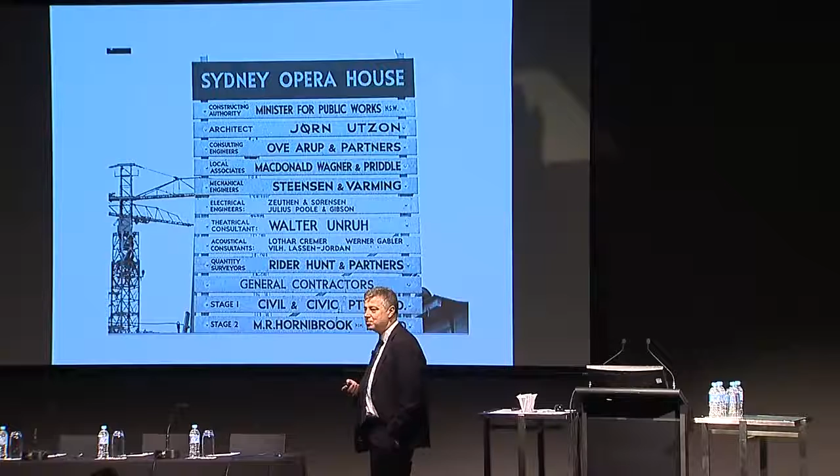And this was their project team, and there's some pretty famous names in all of that - a mixture of Australian companies and overseas firms, and many of those firms are here today. So what it actually represented, ultimately, was really one of the most outstanding examples of integrated project delivery - the way that the architects, the builders, the engineers worked together to deliver a very, very complex project.

So where we come in now, 40 years later, in 2013 - Sydney's learnt to celebrate it and love that building. We were just up at the Danish embassy a few weeks ago, and they told us there's quite a big celebration coming up in October to celebrate the building.

We also have our Construction and Innovation Awards. You look through those awards and you can see them on the internet, and we're still doing some fantastic work. But I suppose for me, the real issue is around what we all know in this room - the issues around construction. A lot of people will tell you that it's never been so tough in the industry, so problematic, and in many ways so dysfunctional.

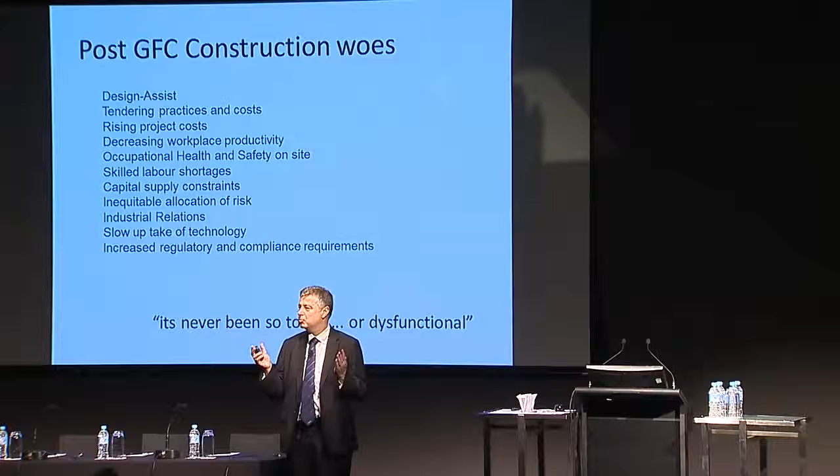So we've got a major challenge, and what we really need is great projects and great delivery. And the best way to do that is with BIM and with IPD. So what we need to do as an industry is celebrate delivery excellence. And until we are able to do that, we're not where we need to be.

If we keep doing the same things that we've been doing, and in fact things are getting worse, things will just continue to get worse. So I've really come to the point that for us, it's very clear that the only way forward is BIM and IPD, and I want to take you on a bit of a journey around that.

In 2010, we went to the US, and I think it was Mark Lowe from the BSA group and Albert. We went to visit a contractor, a mechanical contractor, a big contractor in San Francisco, a company with about a 60-year heritage. We were brought to this firm to have a look at what they were doing, because they actually had some really good capability in terms of BIM and green rooms and those sorts of things.

But I was shocked, because I walked into that building, and there were about 15 people there. The managing director was doing estimating. This was their CAD team, all gone.

I guess the thing that Steve said yesterday was that he was doing this thing. He said that basically, it got so desperate in the US that they actually had to work out what to do, because they couldn't keep doing what they were doing. They actually had to find the single thing that they had to go and do to get their company through. So I saw that, and I was shocked.

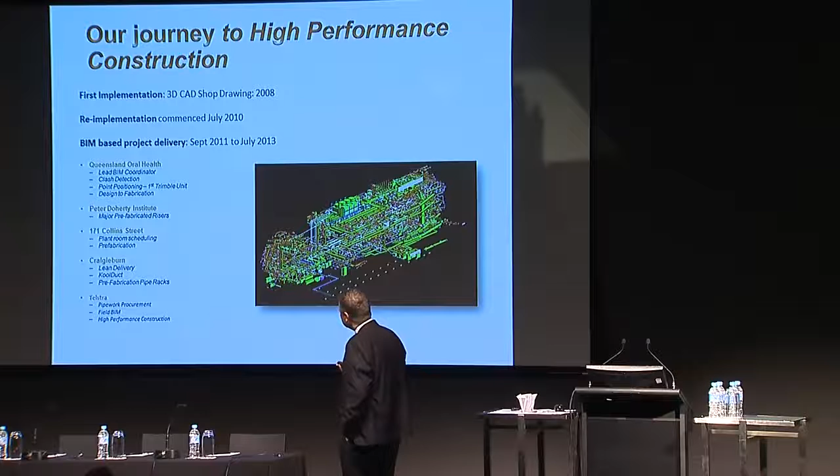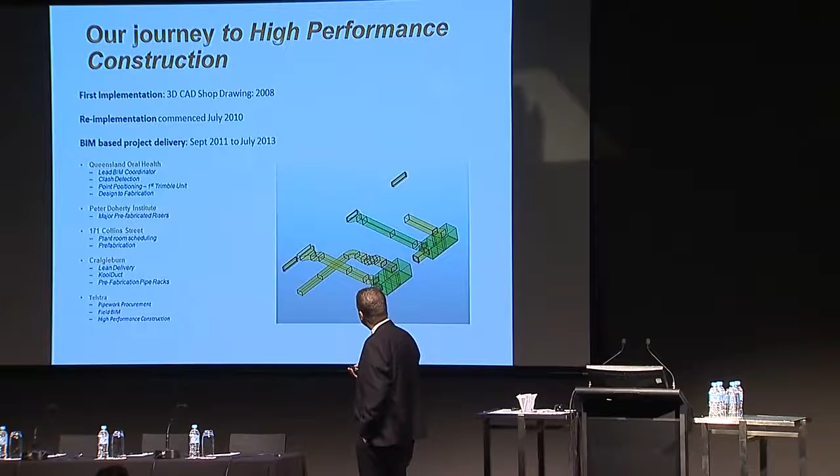We ran the clash detection, worked out how to do that. We worked out how to do a BIM construction delivery plan. We did our very first design to fabrication runs - not perfect, but we got it up and running.

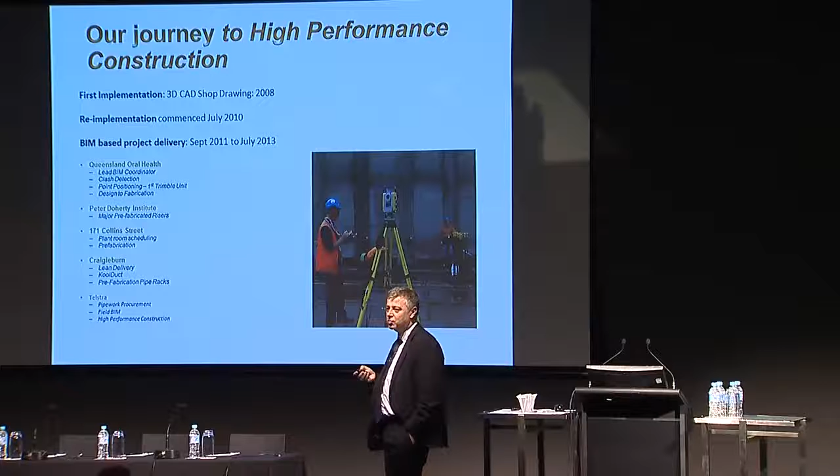We got our first Trimble into the top deck. So what we'd seen in the US, we did for the very first time, Trimble into the top deck - I think in Australia, as David said. There'd been a couple of others using Trimble before us, and it was all being done from the underside, but we actually got it into the top deck, and that transformed the way we did construction. And there you can see the blue bangers.

Now, one of the things that also, in terms of talking about design to working with your supply chain - the first blue bangers we could get were all Imperial. Different companies said Australia's too small as a market, we can't get the US interested. Now we've got metric hangers, right? So that's about working with the supply chain to actually get things sort of working as an industry supply chain.

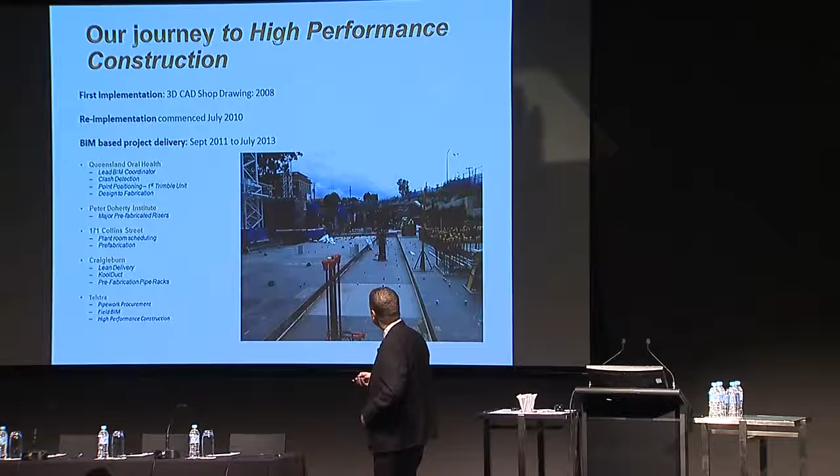We then went to Peter Doherty, and there was actually a job before this, 735, and these are the prefab risers that we put into this project. So with that, we put in 18 modules in 3 days. We really developed our capability in that.

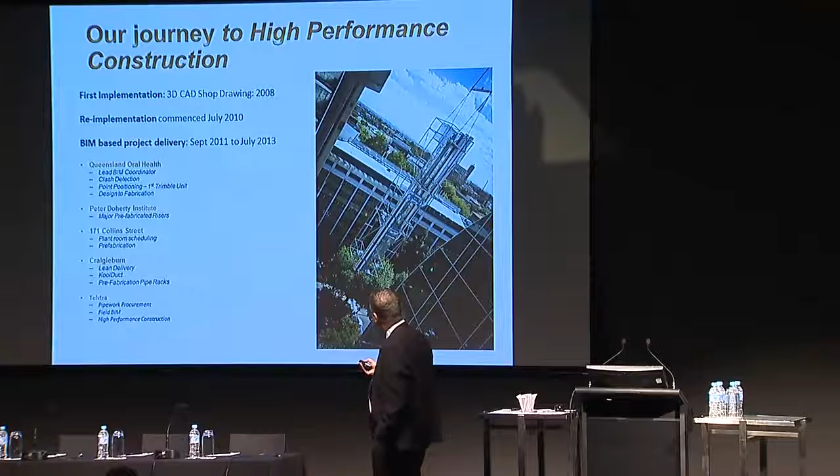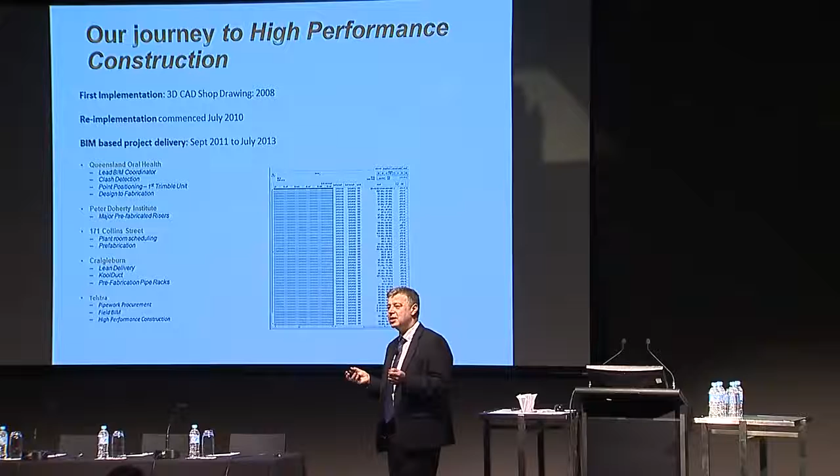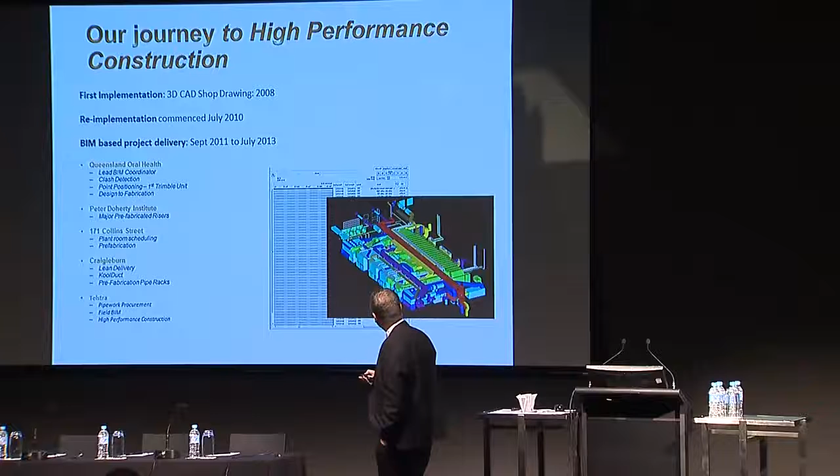And then the next project, each time we're building on what we're doing, we looked at scheduling. The thing around scheduling is, I love Primavera, I need to say that, but it can be very difficult to communicate to a project team around a program, a 28-page program. It's actually much more powerful to convert that program into a model and then schedule it out using the model.

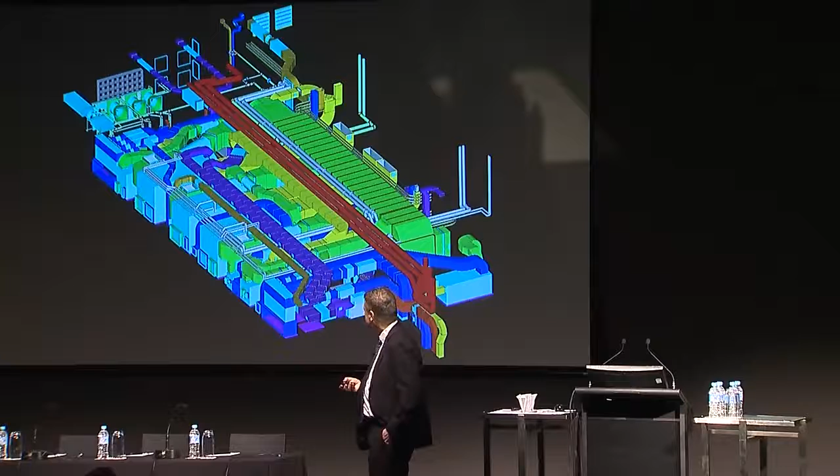So this was the model for 171 Collins Street plant room. Very, very tight, very difficult access. With the ability of BIM, we were able to actually work out how to deliver the thing, sequence it. Not only that, we were able to schedule the supplies, because it was so tight, moving stuff, bits of duct and all the rest of it around the plant room made a huge difference in terms of how we delivered that plant room.

So from that, we consolidated. We then got into Craigieburn and we got into lean delivery. With lean delivery, what we do is try and consolidate all the things that we learnt and work out what it really means in a project delivery sense. We got our first very big KoolDuct installation, and one of the first projects for us to roll out the piping racks.

So as you can see, we're progressively building a capability. At the start of each job, we decide what we're going to do in terms of the next phase of our strategy. So Telstra, which is a data centre, we decided that was going to be our chance to bring it all together, and we were going to really try and implement it.

It was a great job to do it on, and the reason it was a great job was for two things. One is it's principally services, so the structure is pretty straightforward. We've got Lend-Lease building the structure and managing the project and the client and all that sort of stuff, but principally it's about 80-90% services.

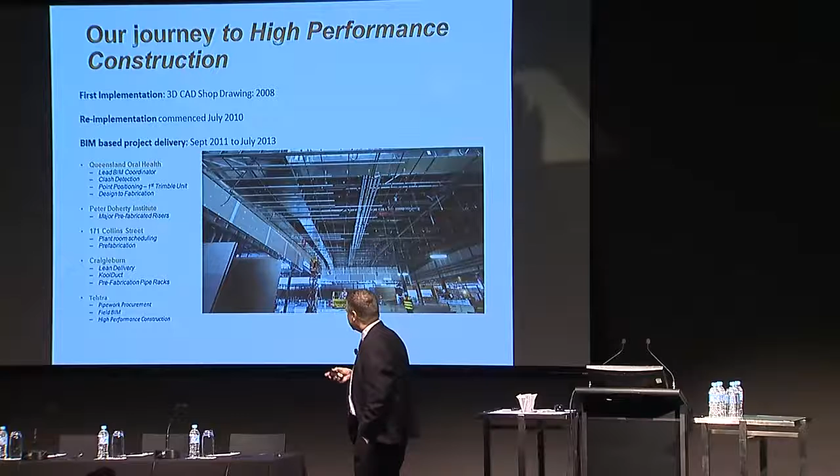We decided that we'd pilot field BIM and bring all these things that we've learnt so far together onto one project. What we were really aiming to do was consolidate all of those lessons. The key enablers for us were we wanted to get BIM-enabled construction. Our guys are now using the model in the field, day in, day out.

We also wanted to really consolidate this Revit design. We got a fantastic model from AECOM, fine-tuning it, developing it into a constructible Revit model, and then using that as the basis for our commissioning and as-built delivery. So what we really set ourselves as a mantra for the project was to get this to be BIM-enabled construction.

The other thing that Alistair McDonald said last year, which I didn't really pick up on for quite a while, is actually the reason we've changed the name of this forum, because BIM is the actual platform for innovation. What we have learnt as an organisation is that we can actually use BIM to innovate. So now we've got people at the top, people at the bottom, people everywhere, people on site, all of them coming back and doing really great stuff.

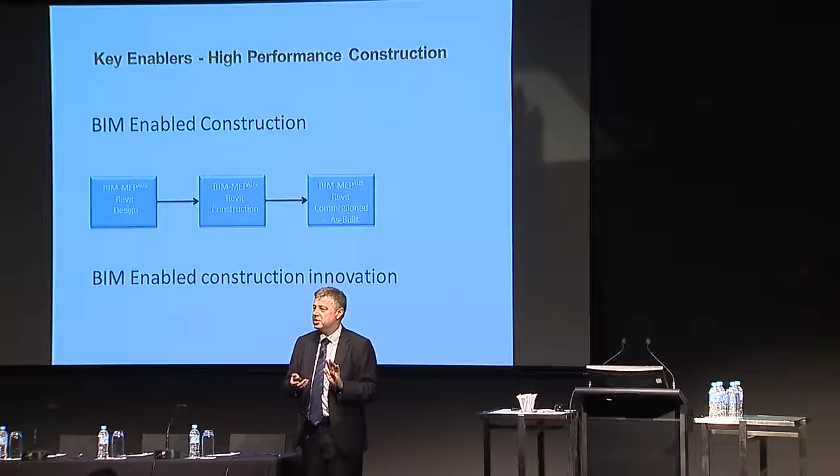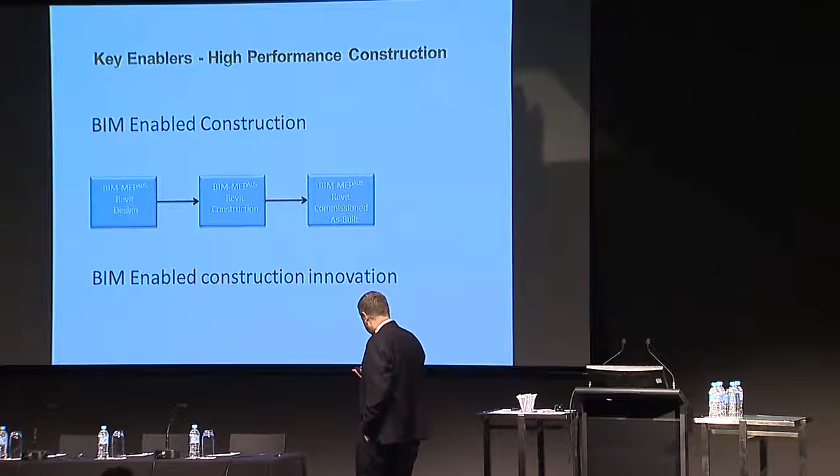So what we've been able to do is energise our team, and the innovation is coming from everywhere. It's actually quite difficult to manage. When I look at this, and we took Kyle Holmes out to have a look at this site, I was actually blown away. When I looked at the Balfour Beatty slide, I realised what this looks like.

So what does it mean in terms of safety? It means there's virtually no material sitting on the floor. You walk around, this is the cleanest site that you have ever seen. Stuff comes in, it gets lifted and it gets put into place. So things that would take a week, two weeks on site, sitting around in bits and pieces everywhere, now come in and go up.

We've got an optimised solution. AECOM did a great job in terms of their design. We probably put some construction expertise into that model and developed it up.

We're exploring all sorts of new technologies and processes. There's virtually no waste on site. It's a clean site. You walk around, I think Kyle would agree, it's just amazing how little's there.

Quality, the quality is brilliant. So this is virtually a fully prefab solution that's using Victaulic throughout. We work really well with Victaulic and One Steel, so we're working much more seamlessly with them. It's a fantastic solution in terms of the quality that we've got on site.

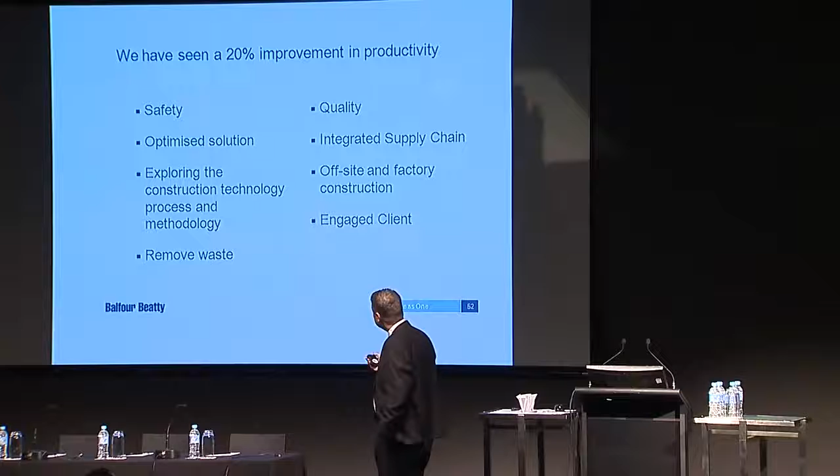Safety and design, it's fully coordinated. One of our BIM modelers, Brett, said the amazing thing is with drawings you're always looking down, but with BIM you can look up in the virtual world and actually see the access issues. We walked around, and we'd separated the cable trays so we could get to our access panels. We've done a lot of really good stuff in terms of safety and design.

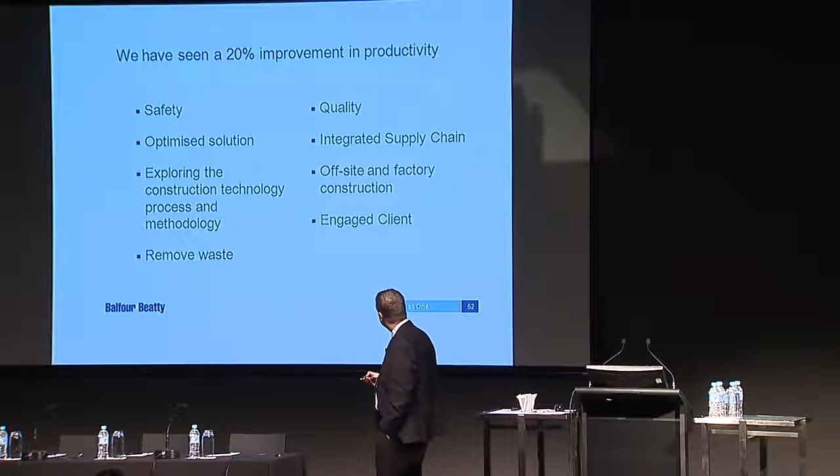We have integrated our supply chain. We're making really extensive use of our off-site and prefab facilities, and that's working seamlessly. And we've got an engaged client. When I say engaged, I just want to talk about engaged clients.

So here's the difference. You want to use Trimble, okay? You start the job and go, oh, we want to do Trimble. One approach is everyone sorts out their own reference nodes - that's not my problem. On this project, the builder's providing the reference nodes. The surveyor sets them onto some external sites, onto external buildings, so everyone using Trimble is using the same set out points.

They're using the same model points. Once the walls get put up, the surveyor comes in and puts the next point. So everyone is using the same set out points, right? That's again the difference between getting some benefit and getting the maximum benefit.

I think we've got a happy client on that, and I think we've got a happy consultant, because of the amount of time they're spending on RFIs and defects on sites. I used to be a consultant, and I know you used to make money in design and lose it in construction. From what I understand from AECOM, they're pretty happy.

So what to expect from all of this is we have to spend more money in design, right? We have to spend less in construction. We've significantly reduced our project delivery risk. We all know there's totally insufficient risk allowance to cover the complexity of the tasks we undertake. We all know it, and what we dread is the bad job. This effectively eliminates the bad job. Ultimately, we're delivering at a total lower cost and getting improved profitability from it.

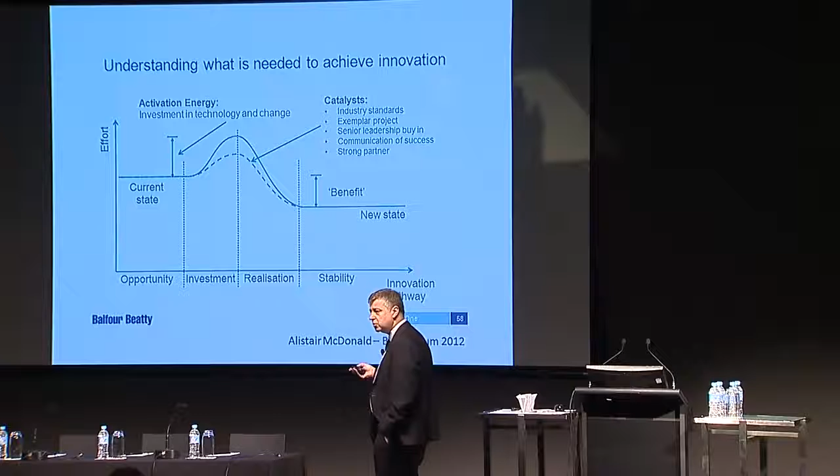One of the slides that I didn't fully understand last year, I sort of understood it but not really, was this one from Alistair McDonald again. What you need to actually do is make continuous investment, and you have to make the commitment to actually get there. So we've continued to invest in difficult times, but once you do it and get out the other side, you actually get to a better place.

What I didn't understand was we'd be delighted if you would join us in helping transform our industry - through the BIM-MEP AUS initiative, or what we really need, I'll be honest with you, is builders and clients who actually have a vision about how the industry should work. There's some out there, and I reckon we saw it in ProBuild yesterday - they've got vision, and whatever part of the supply chain you're in, you're looking for people who want to work with you.

So with that, I hope I've given you some insight into perhaps the journey that you might need to undertake, and also what I'd like to really promote is construction delivery excellence. So thank you. Thanks, cheers.